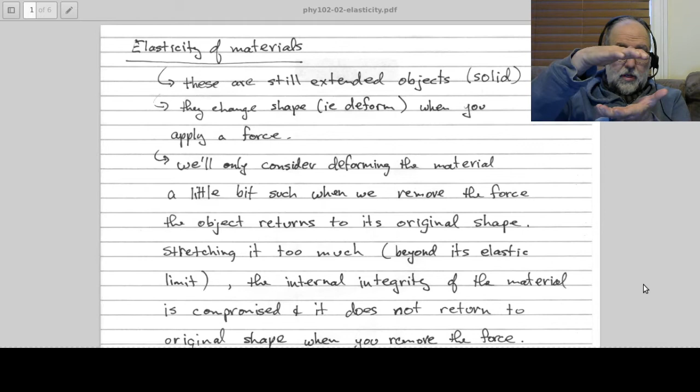If you have a block of Jello and you apply a little bit of force to it, say you're squishing the Jello. Okay, so you got a block of Jello and you apply force, it'll bulge out at the ends, and then when you let go, it'll restore itself to its original form. But you can imagine what happens as you start to apply even more pressure. As you apply more pressure, the material will start to break up inside. It'll start to lose its internal integrity. Little cracks will start to form in the Jello.

And then when you let go, it will spring back, but not to the same original length. Okay, so you've damaged the material. And if you squish even harder, well, then you'll just break it apart completely. Okay, so we're not going to look at forces and torques on an object beyond that which it can sustain, such that it restores itself back to its original form. In other words, we're not going to look at situations where you start to break its internal integrity.

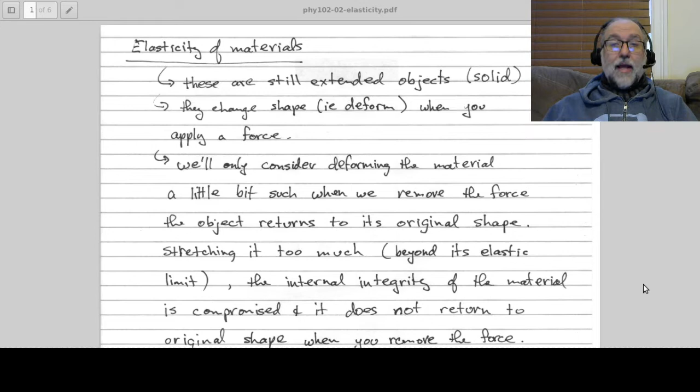Okay, now what happens to a spring as I apply force? Well, as I apply force, it'll stretch. The more force I apply, the more it'll stretch. The more force I apply, yet more. Okay, and within the elastic limit, if you then take that force away, it'll restore itself back to equilibrium.

Okay, so even in the lab, if you took a spring and you went beyond the elastic limit, you start to damage the spring, and then when you let go, it won't quite restore itself to equilibrium. Okay, so again, we're going to stay within that elastic limit. All right, and we had a formula for that.

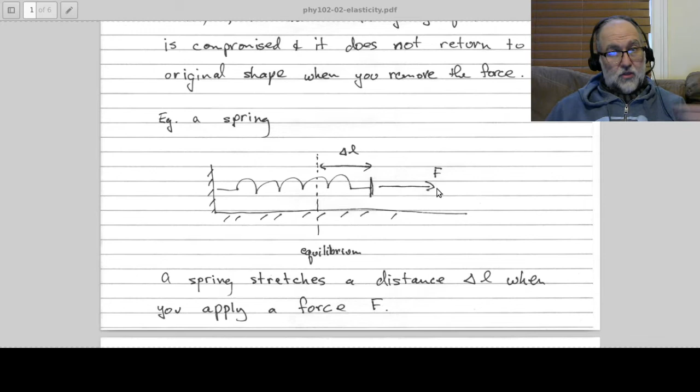Now, last semester, just to be clear, I used X instead of delta L. For today, for this lecture, we're going to use delta L for how much it's stretched. Okay, so F is how much force you're applying to stretch the spring, and delta L is how far the spring will stretch. Okay, the formula is basically Hooke's law. Here it is. F is equal to K delta L.

Now, last semester I had a minus there because we were worried about directions. I dropped the minus sign just because I'm not particularly worried about the direction here. It's only magnitudes, okay? So if you have a certain amount of force F, you'll get a certain amount of stretch, okay? More force, more stretch.

And they are linearly related. In other words, you double the force, you're going to double the stretch. You triple the force, you're going to triple the stretch, and so on, again, within that elastic limit, all right? And then to relate the two, there was this constant K, and the constant K was the spring constant, okay?

That's what it's called. All right, and I'm applying this to a spring, but understand that anything that is elastic, anything that can stretch, even if it doesn't look like a spring, will have some K associated with it. It'll have some spring constant associated with it, okay? And physically, you can think of the spring constant as just how stiff is this material, okay?

So if this material is very easy to stretch or compress, then it has a very small K. And if it's very hard to stretch, then it's going to have a very big K. And you could see that because if you only want to stretch it a little, if delta L is, say, small, but K is really, really big, then F is going to be big, okay? And so that basically says if K is big, then you're going to need a big F for a small delta L, and that means something which is rather stiff, okay?

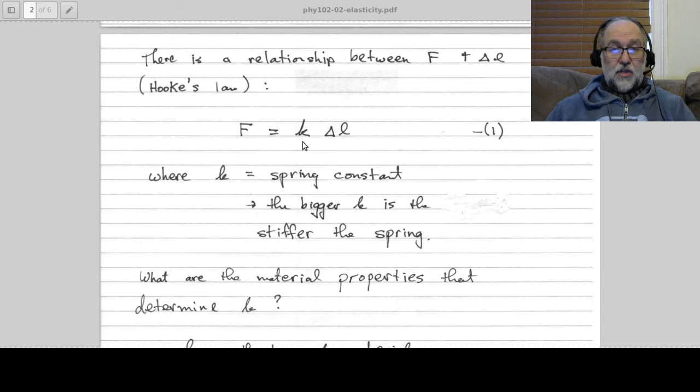Okay. It turns out that K, the spring constant, can actually be broken down into some geometrical properties and a property of the material itself. Okay. And that's my point here, okay? So K is first going to depend on the type of material, all right? Obviously, Jello is more elastic than something like steel. So it's easier to compress and stretch Jello than it is to compress or stretch steel, all right?

But that's not all. That's just the type of material. So that goes into determining what K is. It's also going to depend on the thickness of the material. Okay, in other words, its cross-sectional area, because you could imagine Jello or maybe steel. Steel is a little harder to picture because it's pretty rigid, but I think you'll understand this.

If you have a really thin steel bar, thin enough that you might call it just a wire, well, a wire is easier to stretch because it's less thick than a thick bar of steel. Okay, and the same is true, say, for an elastic band. If you have a very thick elastic band, that's going to be harder to stretch than a thin elastic band, even if it's made of the same material, okay? So we could be talking the same material, but a thicker object is going to be harder to stretch than a thinner one.

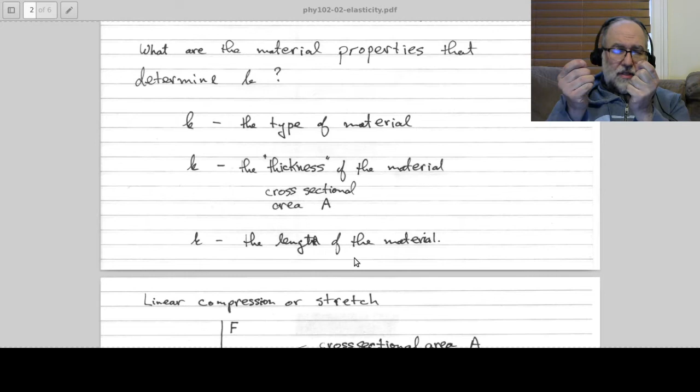And so that's one of those geometrical properties that goes into determining K, which is the cross-sectional area. But that's not it. There's also the length of the material, and this one's the harder one to see. But if you have a short material which is stretchy, then you're going to have to apply more force to it to stretch it the same amount as a longer object of the same material. Okay, and you might go, why?

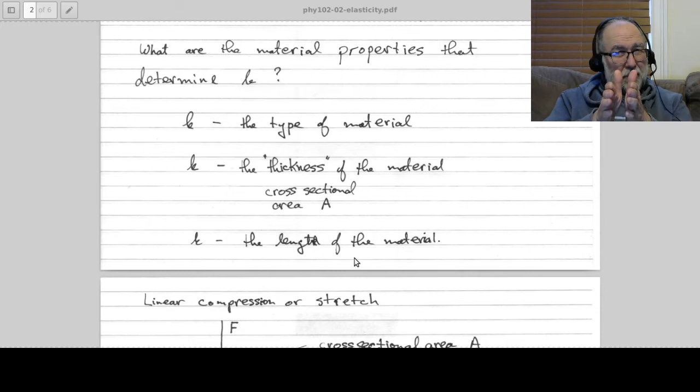And the reason is that when you have more length of the material, there's more length over which the stretch can be distributed. Okay, so if the material is short and you're trying to stretch it 1 centimeter, then there's a little bit of material that you're trying to stretch 1 centimeter. But if it's long and you're trying to stretch it 1 centimeter, well, then that's not that much, because that 1 centimeter stretch is going to be distributed over the entire length of the object.

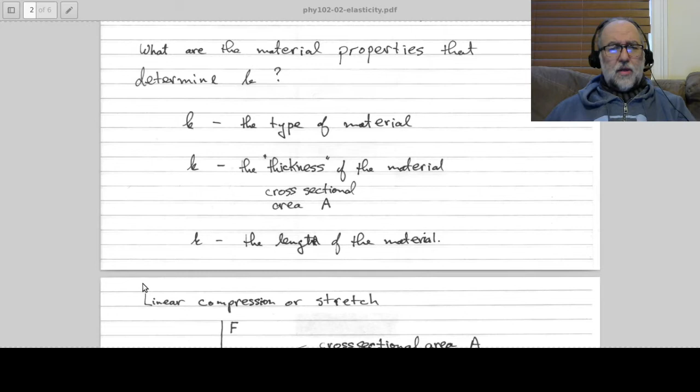Okay, so that's a little bit subtle, but those are the three things that go into determining what K is. Okay, and so here's the equation for it and a picture. You can picture this object here. Say it's a cylinder, and the cylinder has some cross-sectional area like that, A. And the cylinder also has some length before you stretch it, and we'll call that L naught.

Or actually, in this case, I said stretching, but actually compression. So you can either compress it or stretch it. So the original length of the material before you apply any force to it is L naught. And then we're going to apply some force F distributed over that cross-sectional area, and that force F is going to compress the object. It's going to shrink the object's length by a distance delta L. So this picture is actually showing a compression, but it would be the same thing for a stretch.

Okay, so let me go through those parameters once again. L naught is the original length of the material. A is the cross-sectional area. Cross-sectional area just means its thickness. So we have length L, cross-sectional area A. I'm going to apply a force F to this material, and it's going to compress a distance delta L. So that's how much the length contracts under this force that you're applying.

Now the force has to be balanced on top and bottom. This is maybe a subtle point, but I think it's important. Obviously, if you just push on one side of the object, you're just going to move it, because of Newton's second law. So to keep the object in place, not only are you going to push it on one side, but you've got to push it on the other side, and then it'll compress. So the force F that goes into this equation is the same force on the top and the bottom. One you could think of as keeping it in place, and the other one as compressing it.

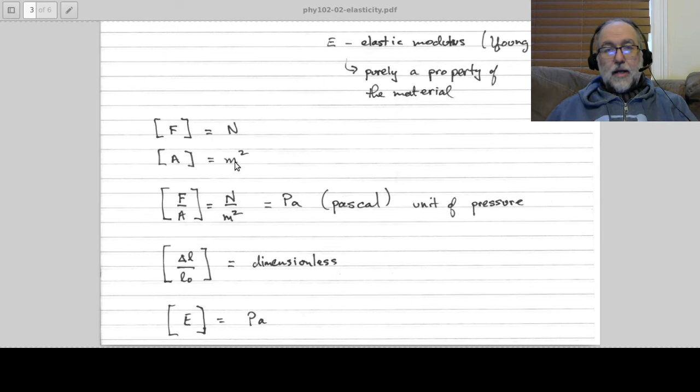Now, on the left-hand side of that equation, let me just scroll back up here, this side right here, you had force divided by area. By the way, that's sometimes in this business called the stress. And the other side, the delta L over L, is called the strain. I don't use those terms that often, but you may see them in other contexts, so I just mentioned them in passing. Back to the units.

Notice that F and A come in that ratio, F divided by A. And so if you say, well, what are the units of F divided by A? They're going to be newtons per meter squared. So those are the units. As I said, this turns out to be pressure. And we're going to be using this quite often when it comes to fluids. So I might as well introduce right now the unit for pressure in MKS, and that is pascals.

Pascal, written Pa. It looks a little funny because it has two letters to the unit, and one of them is capital, Pa like that. But that whole thing, Pa by itself, means 1 pascal. And if you say, well, how big is a pascal? Is it big? Is it small? It's kind of small.

A pascal is just 1 newton distributed over a meter squared. So imagine a square which is a meter by a meter, and imagine just 1 newton of force. And you say, well, how big is a newton? So remember mg. If you had 1 kilogram, g is about 10, so 1 kilogram weighs roughly 10 newtons. So only 100 grams would weigh roughly 1 newton.

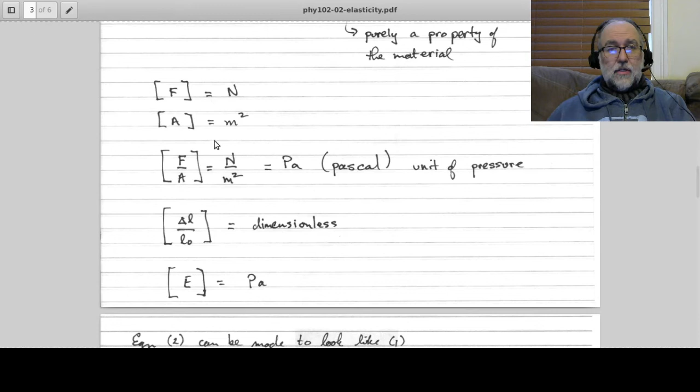So you take a look here and you say, okay, this side here, the F over A, that's in pascals, newtons per meter squared. And this delta L over L, that has no units associated with it at all. So in order to balance the units on both sides, that E must be in newtons per meter squared, pascals. So that's how the units of this work out. Okay, one more thing before I actually start doing problems with this. Actually, two more things.

I've got to show you the other types of deformations that can occur. But you take a look at equation 2 and you go, okay, well, you started off the lecture talking about this equation here for a spring, and now I've got this equation here. How do the two relate to one another? Suppose I wanted to use this equation for a spring. Does it even apply? And there's hope, because there's an F in there, and there's also a delta L. And you say, well, how does it work?

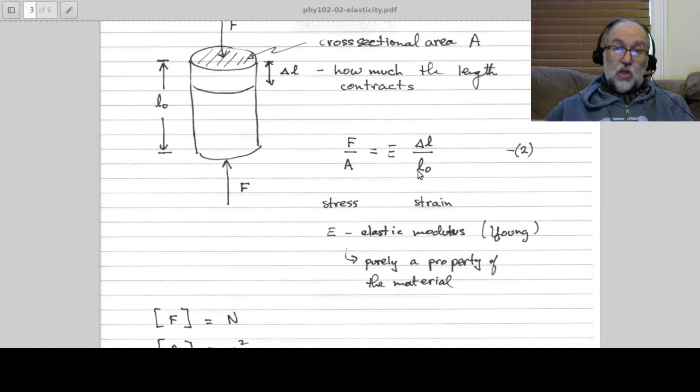Well, if you just rearrange this equation, I can make equation 2 look like equation number 1. If you take equation 2 and you isolate the F on one side and the delta L on the other side, just multiply both sides by A, and then move the L naught into this bracket here, you get E times A divided by L naught. That is your K. So you'll get F is equal to K times delta L.

So if you take a look at K, here written as EA divided by L naught, you can see what I was talking about earlier. K is going to be proportional to the cross-sectional area, meaning the bigger the cross-sectional area, the bigger K is. It's going to be inversely proportional to the length. You can see here that L naught is on the bottom. So the bigger the length, the smaller K is.

And again, that's because you've got more length to stretch, so your delta L gets distributed over a longer length, and it can sustain more stretch. And if it can sustain more stretch for the same amount of force, it means a smaller K. So the bigger L naught is, the smaller K is. And then, of course, there's E, the elastic modulus, and that's purely dependent on the type of material. So there you go.

Those are the three things that go into determining K, and you can see how equation 2 can actually be rearranged to look like equation 1 and explain the physical properties behind K. Okay. So just two more equations that I need to give you before we can do problems.

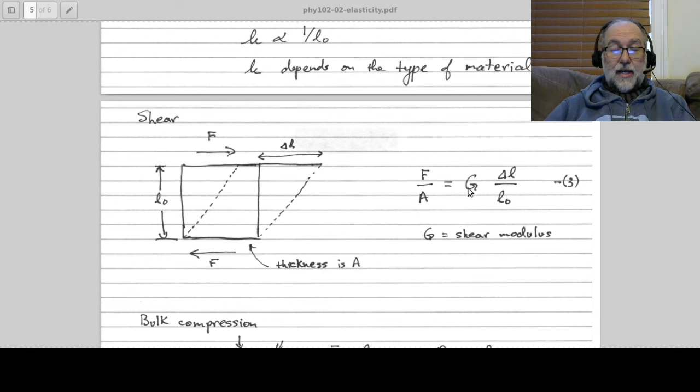So in the previous diagram, what I showed you was what's known as a compression. And a compression means exactly what it sounds like. You grab the object on the top and the bottom and you apply force and the object will compress. Conversely, I can take that object, grab it on the top and bottom, and stretch it. Whether you're compressing or stretching, the same formula applies.

And so this is called a linear compression or linear stretch. The word linear is because it's along a line. So if the object is here and I'm pulling this way, it's stretching along this line here, all right?

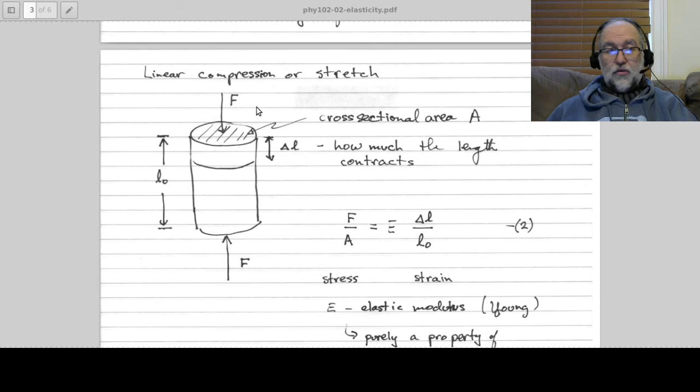It might have deformations in other directions, but the force is just purely along a line, okay? So either like that or like that. And so that's why it's called a linear compression. But I could do something different. I can apply my forces like this.

And so imagine here, this is a block. So just focus first on the thick block here like that. And this block has a cross-sectional area A. I can't show you that because the block is obviously three-dimensional. But just imagine that the base of the block has a cross-sectional area A. So here you might see the length, but you can't see the depth of it because that's into the page or into the screen here. And it has a height L naught. So it has a thickness A and it has a height L naught.

But I'm not going to squish it. What I'm going to do is I'm going to grab the top and bottom like this, and I'm going to shear it. Let me see if I can do this like this. Shear it like that. So I'm going to apply the forces perpendicular to the length. Previously I was squishing it like this. Now I'm going to do this. Okay, so that's known as a shear.

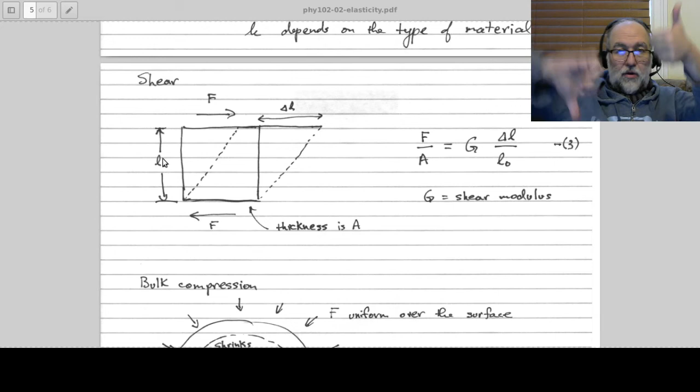Now this is important, especially when you go past that elastic limit with bones, because that's going to be really bad. If you have a bone and you apply a force one way in a bone and a force another way, like my forearm here, I put a force this way and a force that way, I'm going to shear the bone. It's going to be one of these situations. Again, that's beyond the elastic limit, so that's not our concern, but sometimes when we talk about shearing things, that's what we mean.

Also, this is how scissors work, which is why we sometimes call scissors shears. Take a look at the blades of a scissor. One blade is coming down this way, another blade is going up that way, with the paper in the middle. And what you're doing is you're forcing one side of the paper up, another side of the paper down, and that'll shear it. Again, that'll be past the elastic limit.

Now, what does the formula for that look like? Exactly the same as the previous one, but now instead of it being the elastic modulus, it's what's known as the shear modulus. So the same material might have an elastic modulus if you're deforming it by stretching it or compressing it, but it might have a different modulus if you're shearing it. So same formula, it's just going to be a different number here.

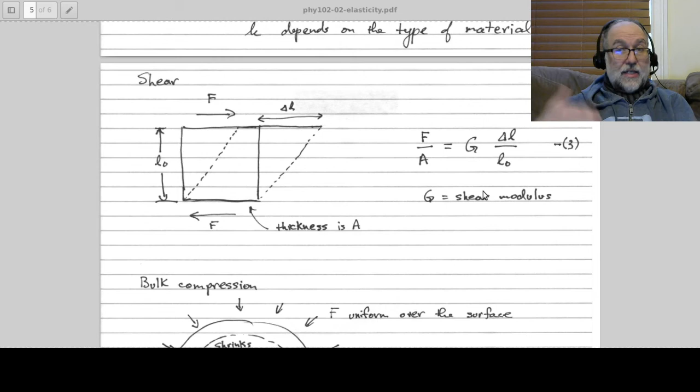Now, in the problems I'm going to give you, I'll be quite honest, these are pretty easy problems. The only difficulty students might have is identifying whether you're talking about a shear or compression, or the next one, which is the bulk modulus. Identifying that is still pretty easy to do, but it's the units, because these have some pretty big and small units. So we'll look at that in a minute. But other than that, there's not a lot here. It's the same formula. Just identify, was it a linear stretch or linear compression? Then use the elastic modulus. Is it a shear? Then use the shear modulus.

And that brings us to the last type of compression that we're going to do, and it is known as a bulk compression. This is when you apply the force uniformly over the entire surface. So you can imagine some object like this, and you can see my arrows here. The force is going to be applied uniformly over the entire object. What's going to happen is the entire object is going to shrink. So this is known as a bulk compression, and the opposite of that, although I didn't show it, would be a bulk expansion. A bulk compression occurs when you apply a force uniformly over all its surface and the whole thing shrinks in volume. All right, so the formula here is a little bit different than the previous ones.

You still have an area, but now it's not just the cross-sectional area, it's the entire surface area of the object. So if you've got a sphere, it's going to be the surface area of the sphere. Or if you've got a block, it'll be the surface area of the box, the surfaces of the block. And then when it shrinks, it's going to shrink in volume.

So if you see the formula here, it's going to be delta V, not delta L, but delta V, that's the change in volume, divided by V naught, which is its original volume. And that's related to F, which is the force that you're applying. But now this force is applied over the area A. It's not the cross-sectional area, it's the surface area of the object. So again, the formula looks very similar, but now there's a couple of changes.

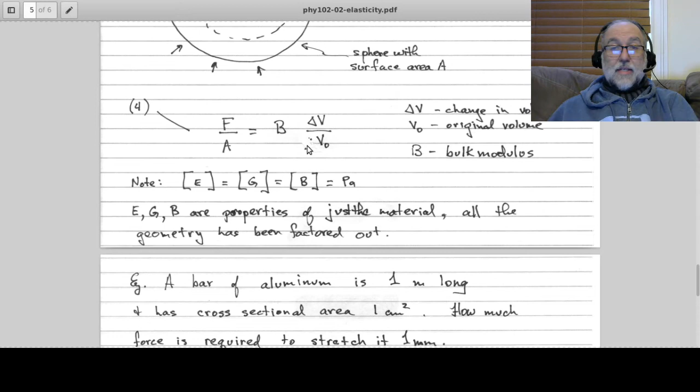The units here, I'm not going to be doing a dimensional analysis for all the formulas. They're the same. Because delta V over V naught is dimensionless, all of these, whether it's the elastic modulus, the shear modulus, or the bulk modulus, are going to have the units of F over A, which are pascals. So they all have the same units, pascals. All right, so that's it. There's no more to the theory, so let's just do a problem.

So what do I have here? I have a bar of aluminum, which is 1 meter long, and it has a cross-sectional area of 1 centimeter squared. This is the one that gives a little bit of problems, because centimeter squared is not in MKS, which would be meter squared, so I have to show you how to convert that one. And how much force is required to stretch it 1 millimeter? And I give you three numbers.

Obviously, I'm not going to have you memorize elastic, bulk and shear moduli. On a test or an assignment I would give you them, and I might have several materials, just to see if you're thinking about it. I'd say these are the elastic, shear, and bulk modulus for steel, here they are for aluminum, here they are for bronze, and then you have to choose the right one. It's pretty simple because you just choose the correct kind of deformation. In this case it's a linear stretch, so you go, aha, I have to use the elastic modulus.

And if you have different materials, which one do I want? Well, that one's easy, the one for aluminum. So this is the number we want to use for the elastic modulus: 70 gigapascals. And then you look at the giga and go, what's that? Because these numbers are both very big and very small, that's the only real difficulty you might have with these equations. Otherwise, it's just plugging in numbers. You're going to have different units, so you've got to put them all into MKS, and know some of the metric prefixes to convert.

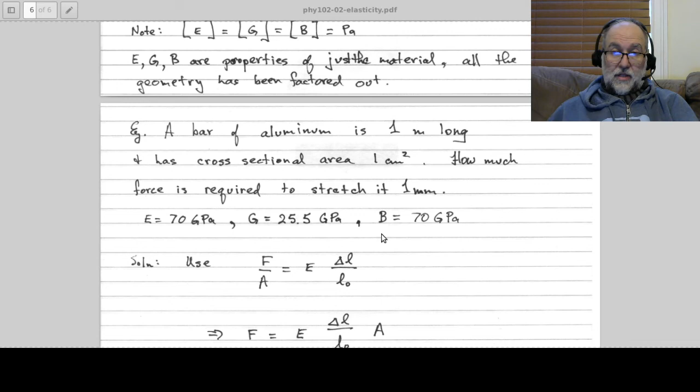The units for force over area are pascals, but this is gigapascals. And giga is billion, 10 to the 9. That's because, as you can imagine, aluminum is pretty strong. It's not easy to stretch. So all the moduli are going to be in the gigapascal ranges. Remember, a pascal is pretty small. Atmospheric pressure is already at 100 kilopascals, and that kilo is 1,000. So here we're into the billions of pascals.

Okay, so let's go ahead and start to solve it. So we have this formula here, okay? And what am I asking you to solve? I'm saying how much force is required. So before I even start plugging into it, I just rearrange it and isolate the force, which is what I want to solve for. Another variation of this, I could tell you how much force I'm applying, and I could ask you to calculate how much it will deform. So then you would just isolate your delta L on one side and then plug in.

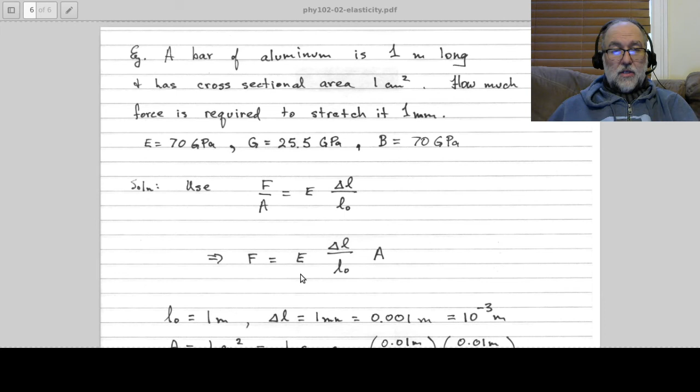Okay, so you have the elastic modulus multiplied by delta L over L naught multiplied by A. Let's look at the quantities one at a time. So let's start off with L naught. L naught is 1 meter. It's already in MKS. Great, no problem. Delta L, I tell you, I want to stretch it 1 millimeter. So you go, well, how big is a millimeter in meters? A millimeter is 1,000th of a meter.

Okay, so you need to know these metric prefixes. You could just Google for them, but you should memorize at least the ones that we're going to use in class. So you should know what a millimeter is. So 1 millimeter is 0.001 meters, or written in scientific notation, it's 10 to the minus 3 meters. So there's your delta L in MKS units, 10 to the minus 3 meters. All right, that was pretty easy.

Whenever you get centimeters squared or centimeters cubed, which you'll see later, then it gets a little bit trickier, because that square means that you've got to convert the centimeters to meters twice. I'm not going to do this every time, but just to show you what's going on here: think of that 1 centimeter squared as 1 centimeter times centimeter. So I want to convert the first centimeter to meters, and I multiply by my conversion fraction, which is 0.01 meters divided by 1 centimeter. That'll convert one of the centimeters, but I've got to do it a second time for the second centimeter.

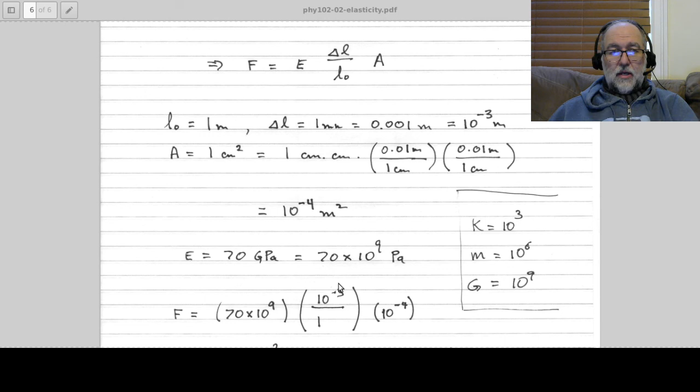So for E here, let me just scroll up a little bit here. I don't think I could. Yeah, there we go. For E here, we're going to put in 70 times 10 to the 9. For delta L, we're going to put in 10 to the minus 3. For L naught, we're going to put in 1. For A, we're going to put in 10 to the minus 4, which we got right here.

All right. Now, just multiply that all out on your calculator. Pretty easy to do, but be careful. It's good to work in scientific notation, because otherwise, if you try to put in all the zeros there manually, some calculators you can't even do it. You have to use that EE button or whatever. Make sure you understand how to do that on your calculator. I can't tell you how to do it in general, because every calculator is slightly different. So just figure out how you do 70 times 10 to the 9, how to do scientific notation in your calculator.

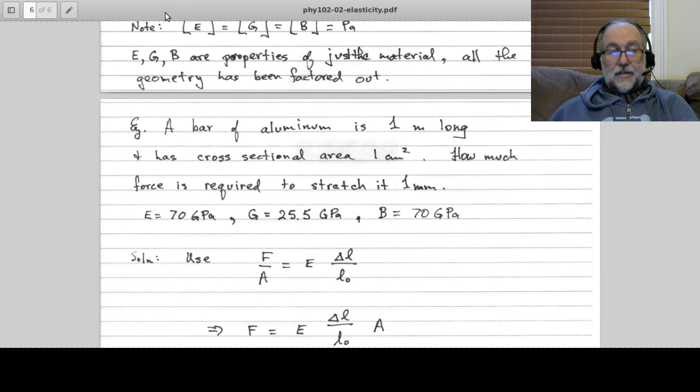Multiply this all out, and you get 70 times 10 to the 2. And that's 7,000 newtons, or 7 kilonewtons, and that would be the answer. So in answer to the question, we have a 1 meter long bar. We're going to stretch it only 1 millimeter. It has a cross-sectional area of 1 centimeter squared. How much force does it take? It turns out to take 7,000 newtons, which is a lot, but it's not an extraordinary amount.

And you could certainly do this either in a lab or even in some machine shop or something like that. You could easily, using some kind of vise, apply 7,000 newtons of force. And then this thing would actually shrink, or sorry, in this case we're stretching it. It would actually stretch by 1 millimeter.

Last thing, maybe I'll say just a little bit more about how to work with scientific notation here. I personally like to do it just manually. And what do I mean by that? Well, I'll just look across here, and never mind the 10 to the whatever exponents. Just ignore that 10 to the 9, ignore the 10 to the minus 3, and ignore the 10 to the minus 4 there. It's just going to be 70, and there's no number there, so 1 and then 1, so I get a 70 out front there. So I just look at the numbers without the exponential parts.

And then I look at the exponentials, and when you multiply exponentials, the exponents add. So I'll go here 9 minus 3, which is 6, and then minus 4, and that's 10 to the 2. So I'll just do the exponents manually. Now, if you're multiplying them, of course, you add the exponents, but if you're dividing, then you subtract the exponents. I'm sure you guys have seen that before, but I just don't want you to make a mistake on an assignment or a test over some exponential, because you might do it wrong on your calculator.

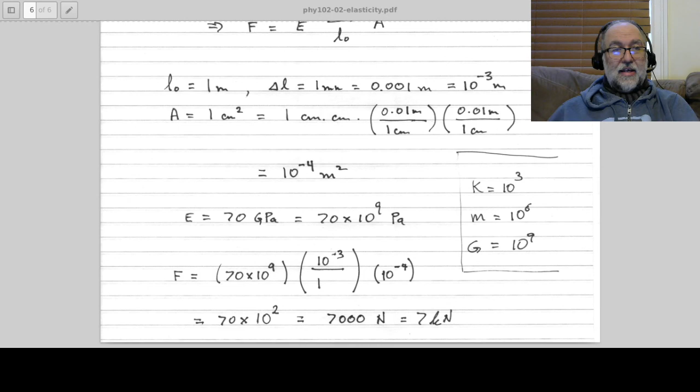Even when you go diving underwater, there's pressure on you. We'll talk a little bit more about that later. But you know what? Your body's going to actually get squished in, and it's going to compress a little bit. It's going to have a bulk compression.

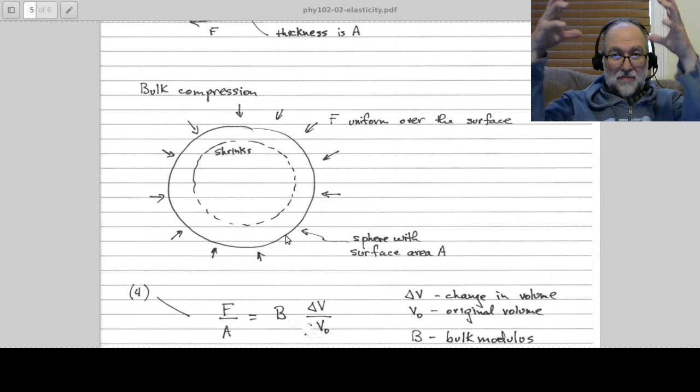Or maybe another example would be, I don't know if you've ever tried to do this, it's kind of hard to do: take an air balloon and then bring it underwater. If you were crazy like I was when I was a kid, taking it underwater, it'll actually shrink as you go underwater because the pressure will compress the air inside it, and you'll have a bulk compression.